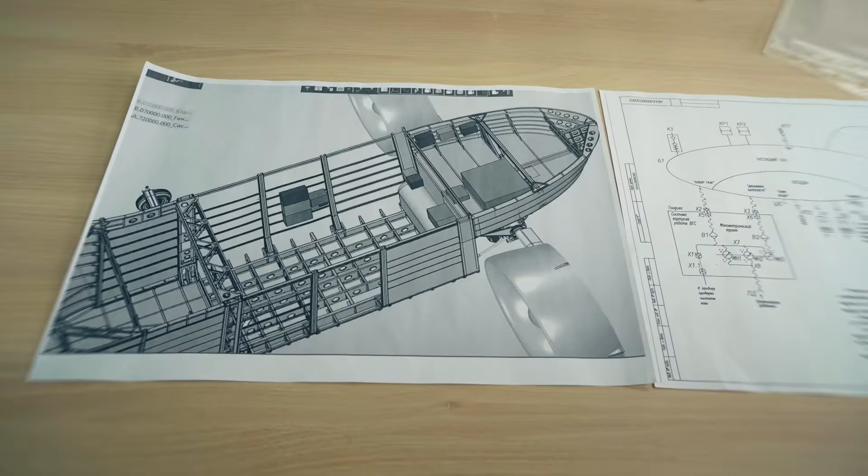Hello everyone and welcome. Thank you for joining us today to this webinar. Today I'm going to talk about artificial intelligence for unmanned airships, how exactly a modern ship can replace a crew of 30 and makes airship operations cheaper, sustainable, and more safer.

Before we dive into the technology in detail, let me tell you a couple of words about myself. My name is Milad Ranaei, software and AI engineer and lead software engineer at AERONOVA.

For over a decade, I have built autopilot systems, ground control stations, sensor fusion, and AI pipelines and architectures for unmanned aircraft, from small drones to complex autonomous platforms. My focus has always been the same: how can software and AI replace manual work, make flight safer, and reduce the cost, which is a very important thing in the business. That is exactly what we do at AERONOVA with airships.

So yeah, you heard AERONOVA. I'm going to tell you a couple of words about AERONOVA.

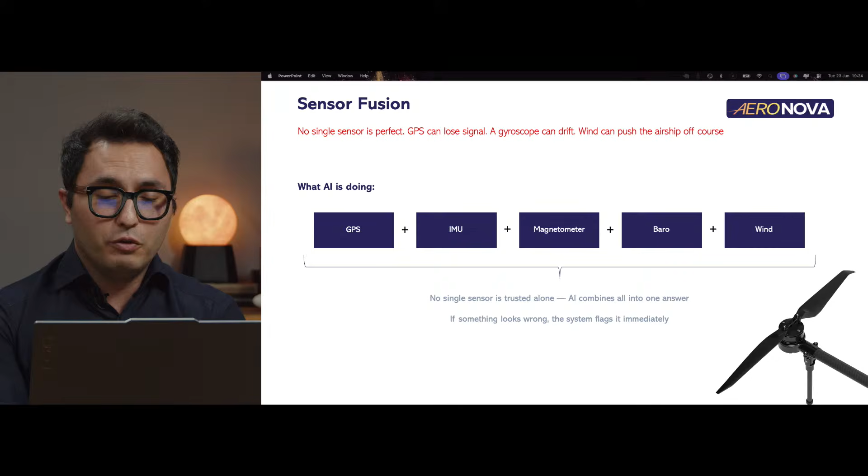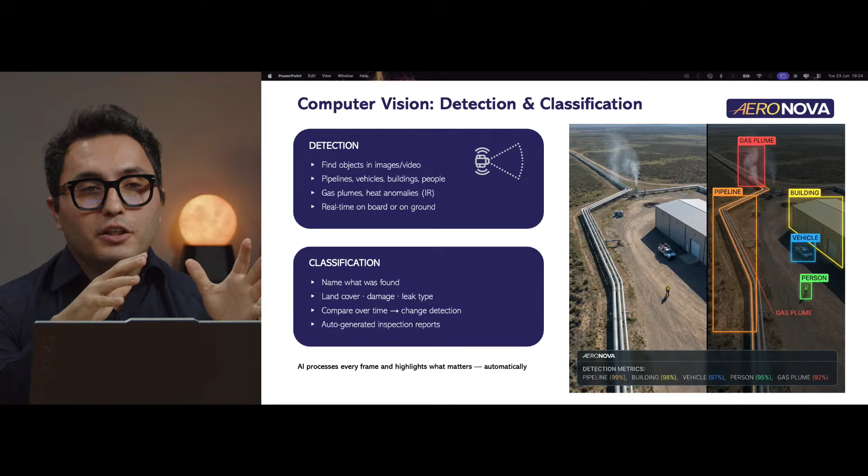Computer vision means AI that can understand images and videos, not just storing pictures, but actually seeing what exactly is inside the pictures. As humans, we can observe our environment, we can see it, detect it, and classify everything around us - that's a tree, that's a person, that's a car, that's a vehicle. But it's very difficult to teach a computer to understand exactly, to get some feeling about the environment. That is why computer vision comes in and tries to fix a lot of complex problems in our lives.

So basically, when we talk about detection and classification in computer vision, which we are already using in our airships, detection means finding objects mostly. We want to find specific objects in the camera, so that after detecting these objects we can try to make the best decisions, or take some action after making those decisions.

So, for example, we are going to detect pipelines, or specific buildings, vehicles, a person, gas plumes. As you can see in the photos in the presentation, classification is related to detection. After we detect, we need to classify, meaning naming what exactly was found. So this is pipe, or this is farmland, or this is damage, for example. So here is about detection and classification.

For an airship flying slowly, mostly at low altitude, this is extremely valuable because the cameras can observe everything with more detail and accuracy. The camera sees a large area around the airship because it's not flying very high like an airplane. So AI processes every frame and highlights what matters in these photos automatically, without any human touching or highlighting it, or watching the screen. Everything is done automatically by AI. This is how we turn a flying vehicle into a smart monitoring platform.

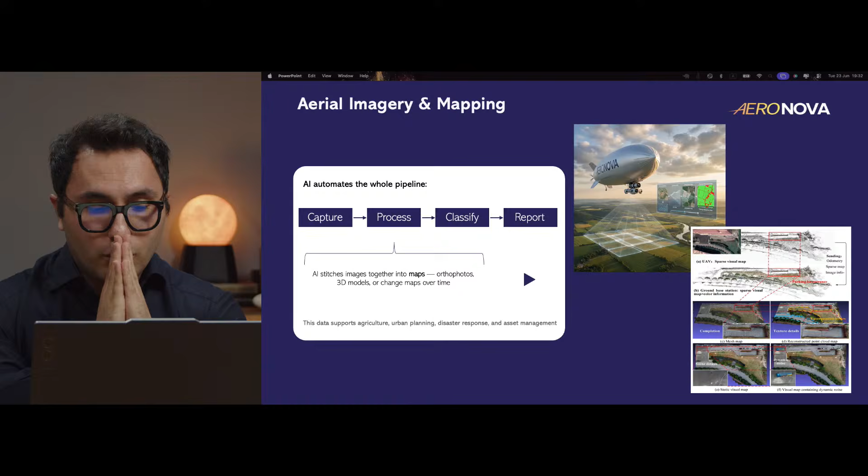So instead of sending a survey team, for example, to gather information from that area or that land which is not accessible, and probably many kinds of areas are not accessible by humans, we can just very easily send an airship. Instead of manually reviewing thousands of photos, AI does it in 1 minute. So it can collect a lot of information from the specific area in a couple of seconds, process it, and try to make the best decisions about what exactly to do.

So flying over the area is one thing. Flying safely around obstacles is another thing, which probably many of you are also going to ask about. What if we have some obstacles, for example, in front of the airship? What are we going to do in these situations? Yes, let's talk about this a little bit. So, how can we solve it? So, say, for example, the airship is moving and some obstacles come in front of the airship.

So obstacle avoidance is a critical AI task these days, and many scientists all around the world are working on it, not only for airships, but for drones and autonomous vehicles. Airships basically move very slowly, yes. But they are very huge, so they cannot turn quickly like a drone. Drones are very small vehicles, and they can change direction very quickly. But airships are not able to do it because they are huge and very slow.

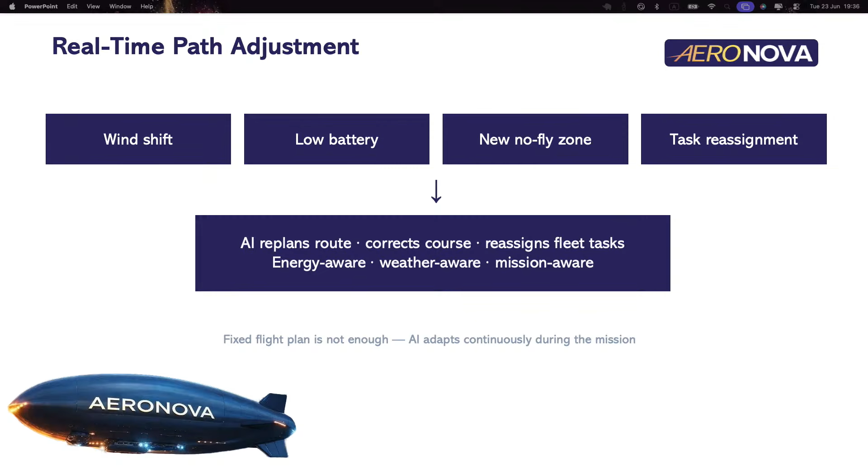So we cannot just go to the ground control station for the unmanned vehicles, set the points, and say move directly from this point to that point to reach the destination. We are not able to do it because winds can change and the weather can change. They're absolutely unpredictable. We cannot predict them, or even if we are able to predict them, probably the predictions are not so accurate. So AI enables real-time path adjustments.

During the flight, the system constantly compares where the airship exactly is with where it should be. The AI actually tries to understand this. And if the airship gets pushed, for example, which of course happens, then AI corrects the path. I will come back to this a little bit further to tell you exactly how. But for example, if the battery energy is lower than expected, then AI shortens the route or sends the airship home safely.

So, for example, the airship is in the air, is moving, and suddenly the battery energy is getting low. So the airship must make the best decision about exactly where it must land and how it can land, and this is why, again, AI plays a very important role in understanding how we are going to change and, in real time, adjust the path of the airship to the circumstances. So the path adjustment works in the air.

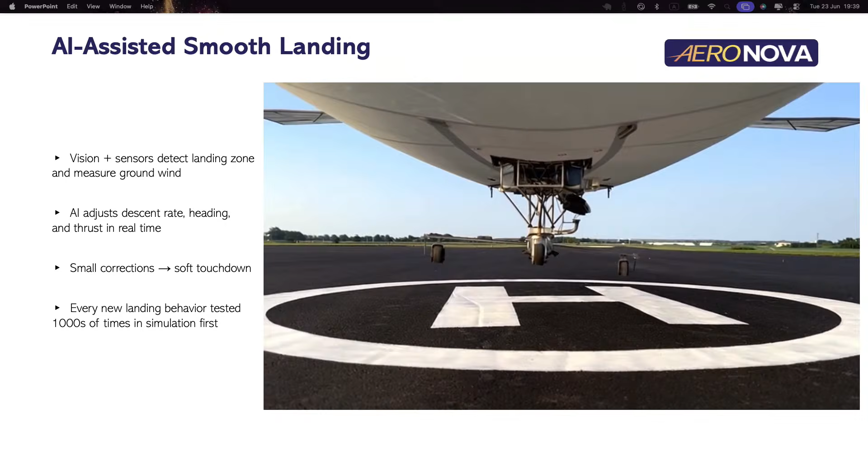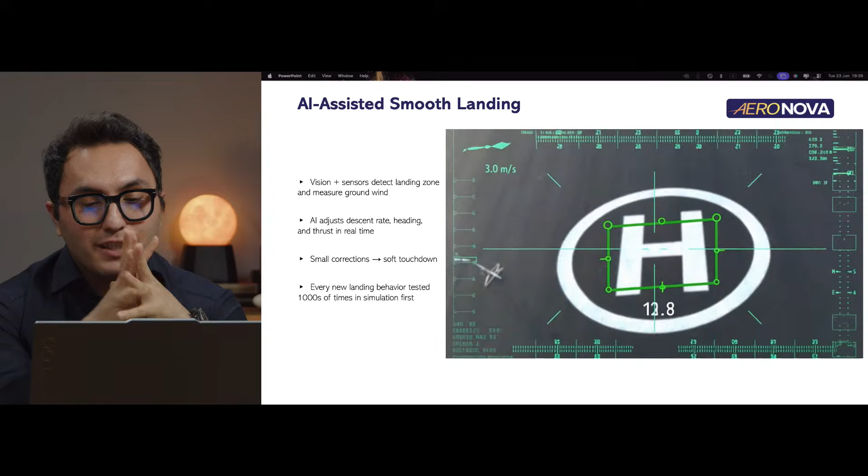So landing the airship is, as I told you, one of the hardest topics, especially without human pilots. Airships are sensitive to wind, as I said, and near the ground there is turbulence. So AI helps by using vision and sensors to detect the landing zone, as I show you. It tries to measure wind speed and direction and adjust the descent rate and heading in real time.

So the AI landing control works like a careful pilot: slow approach, small corrections, soft touchdown. It can use visual markers on the ground or high-precision GPS. We tested every new landing behavior thousands of times in simulation before it goes to the real ship. Safety first, always. So landing relies on algorithms working together. As I told you, it's a very complex task.

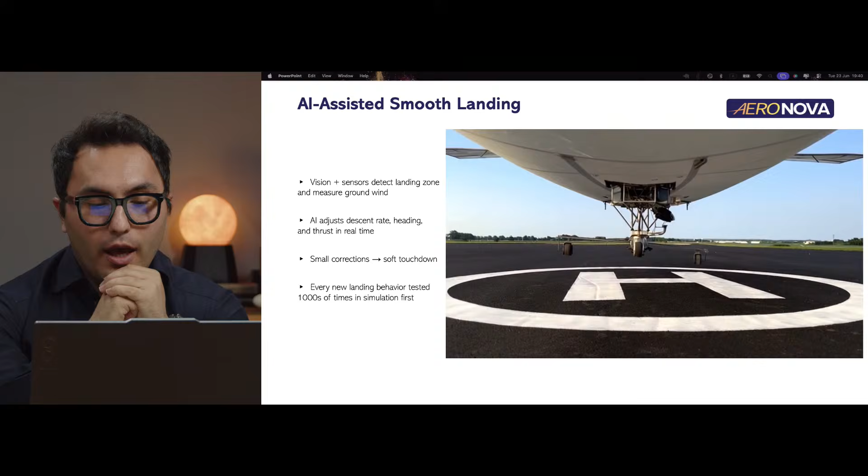Let me explain the three most important ones, which are PID, reinforcement learning, and wind control. But before explaining these three important algorithms, which are the base of our unmanned airship, I want to give you one intuition about this landing.

So we are using not only an RGB camera, we are using a LiDAR camera as well. So what exactly is the LiDAR camera doing? The LiDAR camera tries to make a point cloud of your environment. It has depth inside the camera, so from this depth it generates a point cloud.

And using this point cloud, we understand how far, for example, the airship is from a specific object or from the land. This is why we are not only using an RGB camera, we are also using RGB-D and LiDAR cameras. In the unmanned airship, version AERONOVA 01, we are using more than 5 cameras around the airship to scan the environment around it very accurately.

And we are using the RGB-D depth camera and LiDAR camera for calculating distance and detecting the land, and with highly advanced AI and reinforcement learning algorithms, we try to adjust the speed and direction of the airship to land smoothly. So the three main algorithms we use in the airship are PID, reinforcement learning, and wind control. Let me explain these three important ideas that power our AI in simple words.

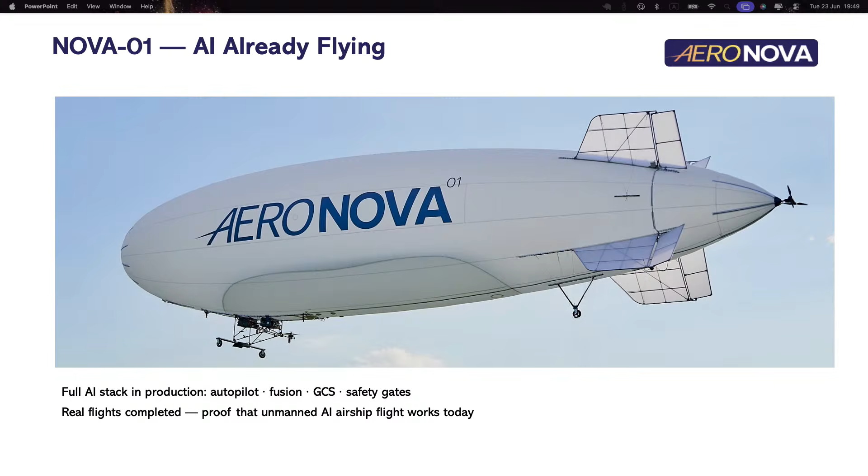So here I want to very quickly show you our application, our ground control station basically, which we have developed here for the last 2 years. All the algorithms and sensors I have mentioned, which we have set up already on our airships, all this data must come to some ground control station, as I already mentioned. So what is this ground control station?

This is a software that gives operators the ability to see exactly what is happening inside the airship. In any kind of autopilot system, not only related to airships, for drones or any kind of autopilot system, you can use this ground control station. AERONOVA developed our own ground control stations for the last 2 years.

And right now I can claim that our ground control station, visually, compared with the other ground control stations, is a very complete ground control station. We are right now integrating AI into these ground control stations. And it has many features already, so you can control the airships based on these ground control stations very easily.

You can make a path for the airship and tell the airship exactly in which kind of path it must move. You can define on the map, for monitoring, that after entering a specific zone your camera starts to turn on and monitor the area. So as you can see here, I just try to make one more operation.

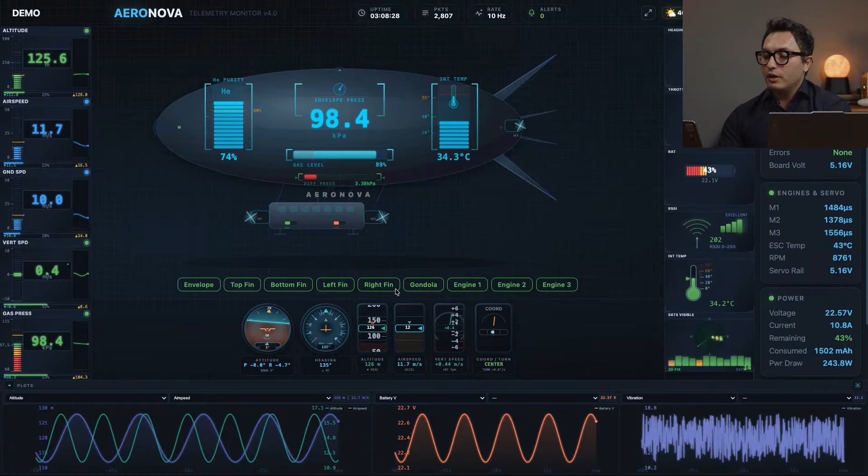And here, at the same time, you can see all of the telemetry indicators, such as the altitude indicators, speed indicators, gyroscope indicators. You can see all the indicators here, how exactly the engine is working right now, whether it has any error or not. If there is an error in any of the engine's parameters, it is shown here by changing the color. Also the airship changes color dynamically.

So everything inside the airship dynamically changes color if the pressure goes down or up, if the temperature changes, or any kind of system error we have here. Changing the airship, or the gondola, or any of the fins, or if the fins are not working, it changes the color and immediately sends the alert not only here but to other platforms, to inform the operators about this error as well.

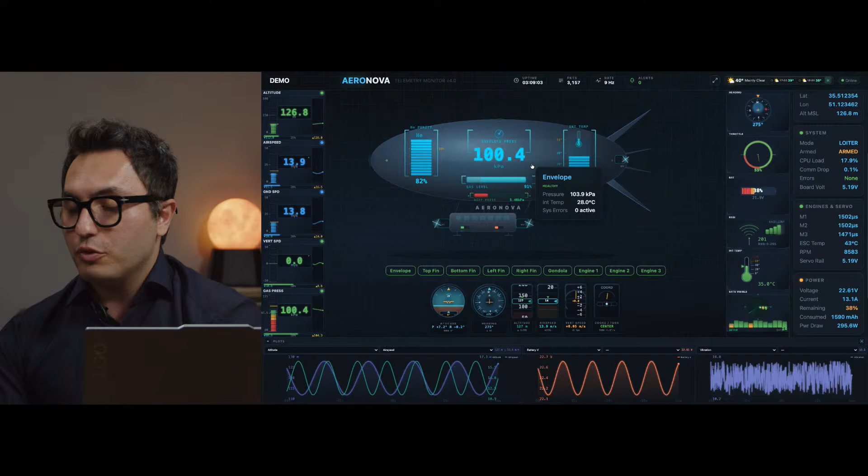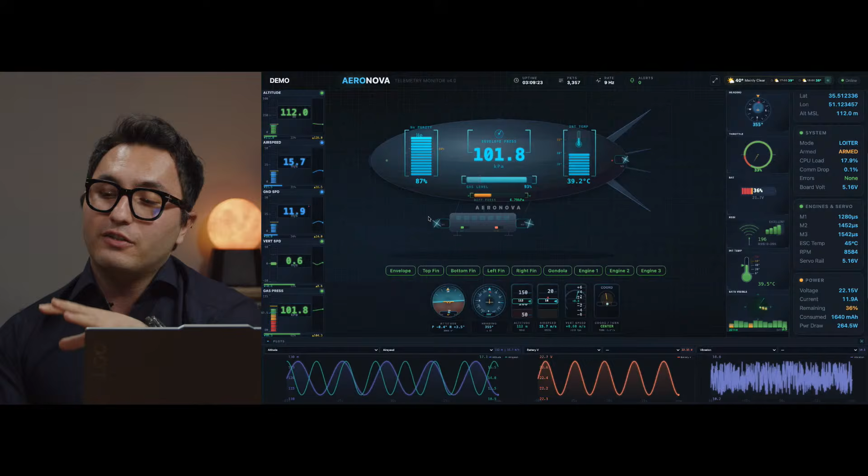And behind this we are setting up an AI right now, which we are improving, that is learning from the simulation. This is exactly the simulation data. We are increasing the wind speed and saving this data for the future, for training the reinforcement learning algorithm, and in some parts we are using a supervised learning algorithm, which is manually trained on specific data.

And after you set up everything, we have a camera panel. You can set up the cameras, what actually you can see in the camera panel. You can change the map. And moreover, we have added, this is for exactly that scan which I have already mentioned in the presentation, the ability here to change the map from 2D to 3D, to see exactly how the airship is moving, at which altitude it is moving, and which kind of obstacles the airship faces.

So here we can change the maps from 2D to 3D to see all the altitude points, and all of these maps are going to be 3D after scanning. So it will show the apartments, the height of the apartments, so that we can see exactly how the airship moves between these 3D maps, between these points. So you can monitor everything, and this monitoring which the operators can do here is actually done by AI behind these applications as well.

So all the things I told you here are not only theory, they are actually in practice right now, but we are practicing, improving, and developing them right now. We are not done yet. We have a lot of things to do because nobody can claim to achieve 100% accuracy in AI. So this is just a very short explanation about our ground control station.

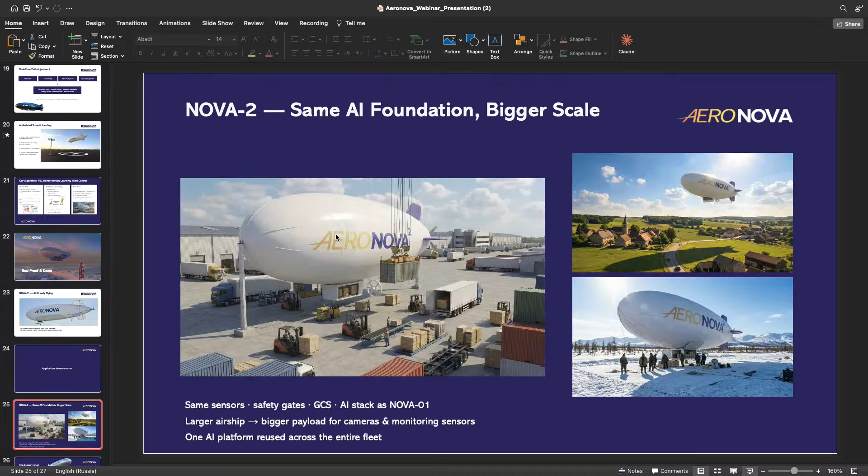Moreover, here we also have the NOVA 02, which is going to launch probably in a couple of months. In the NOVA 02, we are supposed to apply all of these AI algorithms to help the pilots make better decisions. So this AI which we are integrating right now doesn't only belong to NOVA 01, it also belongs to NOVA 02. The NOVA 02 is already being assembled, so we are working on it right now, and I hope very soon we can achieve a very significant result.

So this is all of this presentation, what I have mentioned. Again, all the AI, all of these things which I have demonstrated to you, I can claim that they are not only in the theory part. For one of the algorithms, we are supposed to publish a paper, for example, for that AI part. So all these things are actually in action right now. For more observation, you can later check out our YouTube channel and observe all of the videos there to understand better.

So right now I can finish this presentation. Basically, I have already explained most of the important things about the AI and how we can integrate this AI.